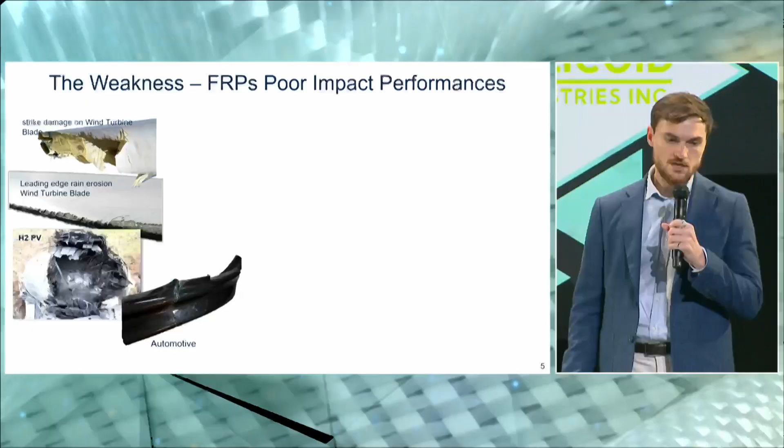What we tried to address was one of the key weaknesses of fiber-reinforced composites, specifically their poor impact performance. And this is a problem that affects a wide range of applications, from wind rotor blades, hydrogen pressure vessels, automotive components, aero structures, down to sporting goods applications.

The main reason is we tend to use in conventional FRPs brittle reinforcement and sometimes resin systems that lead to damage localization, poor energy absorption, and therefore poor impact resistance and structural integrity. And as a result, we tend to overbuild structures to meet safety and performance requirements.

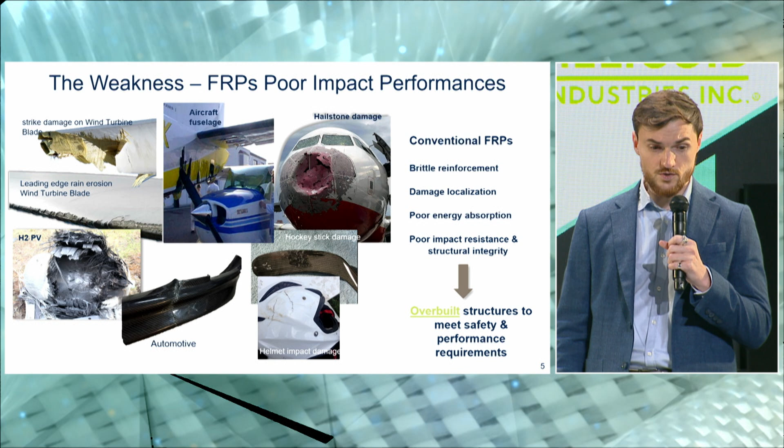What we did is to get inspired by nature. In nature, you can find several architectures that have developed to resist impact and to protect animals and plants from external threats. Specifically, we looked at the mantis shrimp. This is a very aggressive animal. It uses its club to strike prey it feeds on, like a hammer, and it manages to crack shells, which are considered to be quite tough themselves.

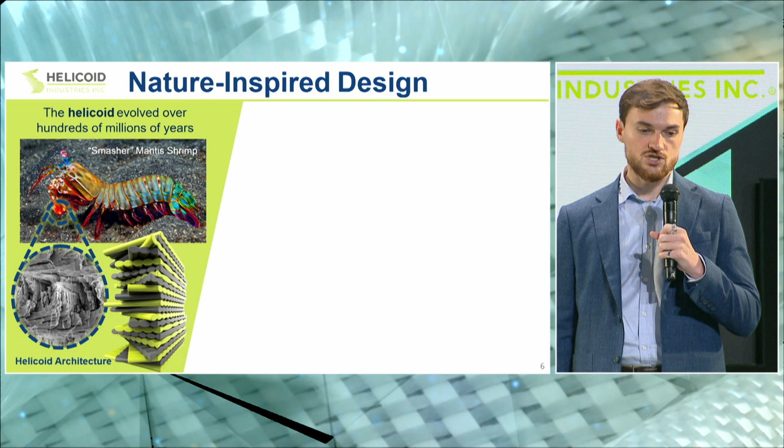If you look inside the microstructure, you will see that it is composed of UD layers, very similar to a conventional laminate design that we use today in engineering, which are slightly rotated with respect to each other to form this helicoidal distribution of fibers.

So compared to a traditional layup where we tend to use large interply angles, usually larger than 30 degrees, in helicoid we smooth the change in fiber orientation with angles lower than 30 degrees. And we also use blocks of traditional layup to tailor stiffness and strength of the laminate.

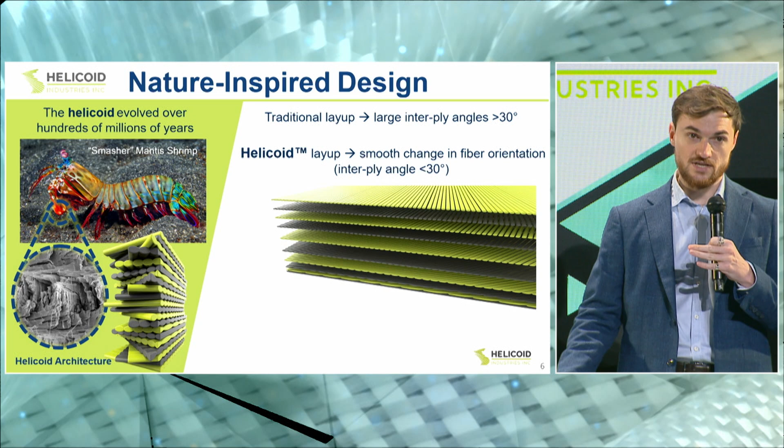The benefits of this are, first of all, we reduce interlaminar stresses. Therefore, we delay delamination onset in the composite. But more importantly, when damage initiates, you get this type of failure in the structure, where you can see a cross-section of the actual club, and in white you see a lot of matrix failure.

So the energy gets dissipated through matrix cracks, diffused through matrix failure, and you leave fibers undamaged. You create these highly complex fracture patterns in your structure that allow you to dissipate energy, but at the same time to preserve a very high structural integrity.

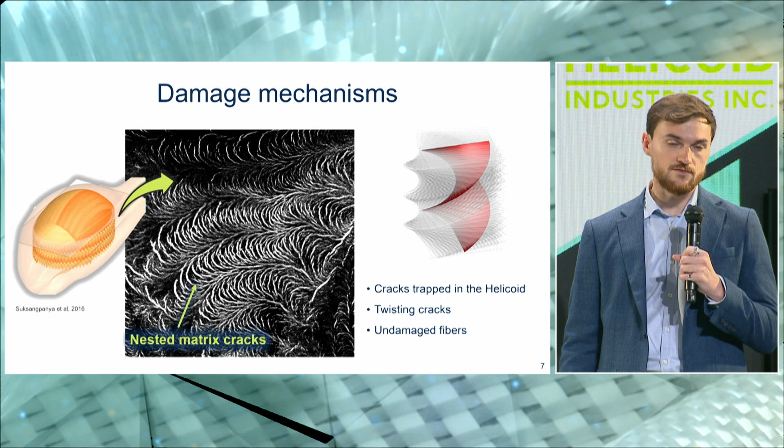A unique selling point of the technology, as I said, is a 2D fiber architecture. So you can use it with any type of fiber, resin combination, and material format, as long as you can maintain an alignment. So continuous fibers in a UD, multi-axial NCF, or aligned short fiber composites. It is tailorable to be fully quasi-isotropic, making full rotations with the helicoid architecture, or directional to have a preferential loading direction in your structure.

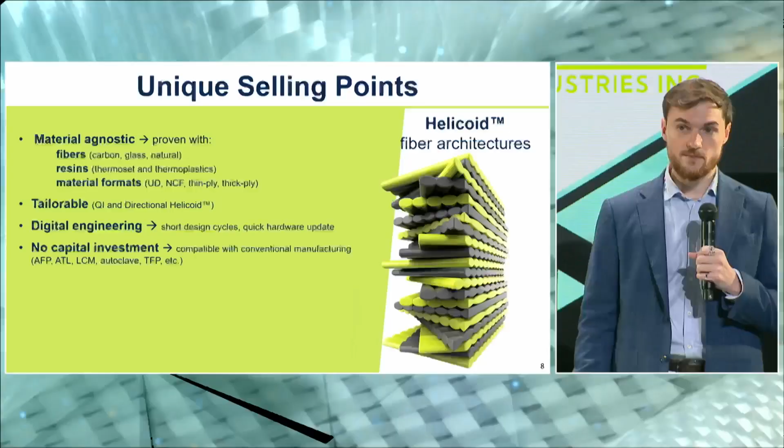We support the implementation through dedicated software and failure codes that allow us to simulate performance of our helicoid layups. There is no capital investment for the deployment because you can use the same manufacturing process and technique that you have been using for processing UD or multi-axial NCF. It is IP protected, which gives you a competitive advantage when you license the technology from us.

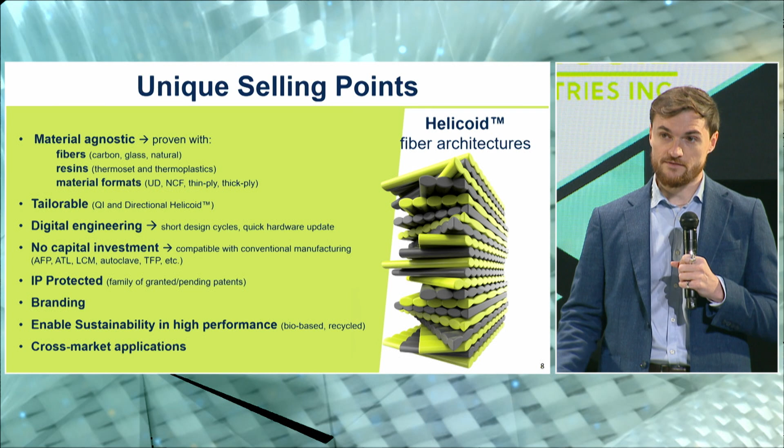There is a strong branding opportunity as well, that's more relevant for applications where we work, for instance, in sporting goods. And as I will show you later on during the presentation, we also enable sustainability in high-performance applications by enhancing performance of bio-based materials as well as recycled composites. And the technology works in cross-market applications. We have applications in sporting goods, automotive, aerospace, defense, and so forth.

Let me give you an example of our solution. One of our key developments at the moment is related to automotive EV battery enclosures, and it's in collaboration with TPI Composites and Saertex. I'm not going to spend too much time on this because I'm pretty sure you are aware of the importance of this application in the composite industry these days.

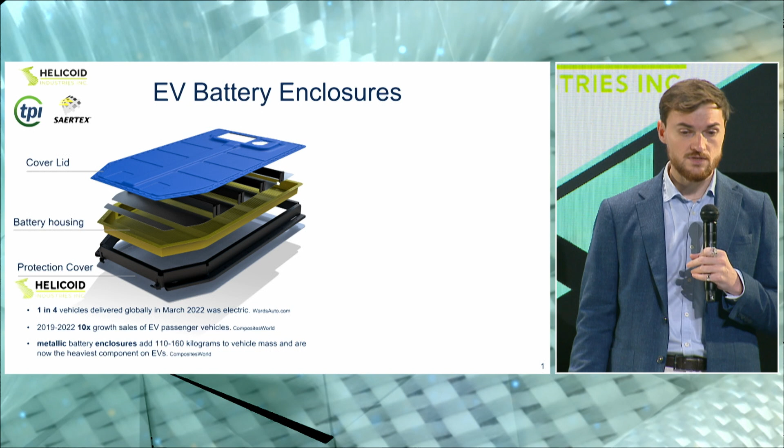So we are looking at deploying the technology in the protection cover of the battery pack of an EV, the part that needs to resist impact from the road. Beyond all the requirements that the part has in terms of fire resistance, EMI shielding, and so on, key requirements for mechanical performance are resistance to perforation as well as reduced deflection, because during an impact you don't want the battery protection to crash against the battery pack.

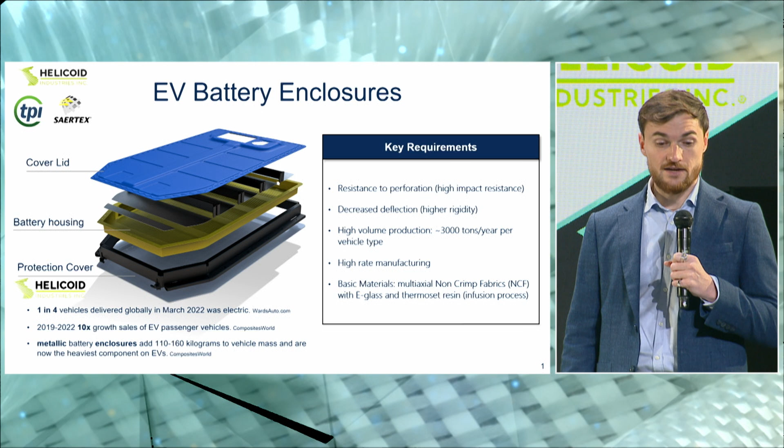It's also a high volume production solution, more than 3,000 tons per year per vehicle, high rate manufacturing, and for this specific application we use multi-axial NCF with a thermoset solution and a liquid composite molding.

So this is just to explain to you how we add value to the supply chain. So for this application, there is a supply chain already in place. We've got a weaver, Saertex, that supplies fabric to TPI, that molds the part and sells it to the OEM. So Helicoid interacts with the entire supply chain, tier 2 and tier 1. We work with Saertex to engineer the fabric.

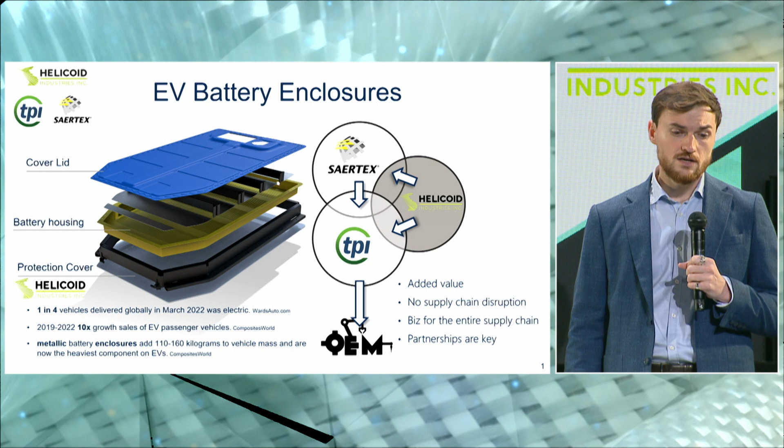We work with TPI to engineer the design of the part, because eventually what we deploy is a new, more efficient layup sequence of the part. And therefore, the idea is that we want to add value to the supply chain to enable more business for the entire supply chain, because in this way, Saertex is able to sell more of their materials with Helicoid technology to TPI, and TPI has a competitive advantage against other tier 1s for a more efficient structural solution.

Let me go then to the development itself. This is how we usually interact with companies in general. So we start off with a design phase. In this case, we received a reference solution from TPI that was making use of a combination of biaxial NCF and woven layers positioned on top and bottom of the protection cover. The woven layers are there just to protect from impact, and they add cost, more expensive than a multi-axial NCF.

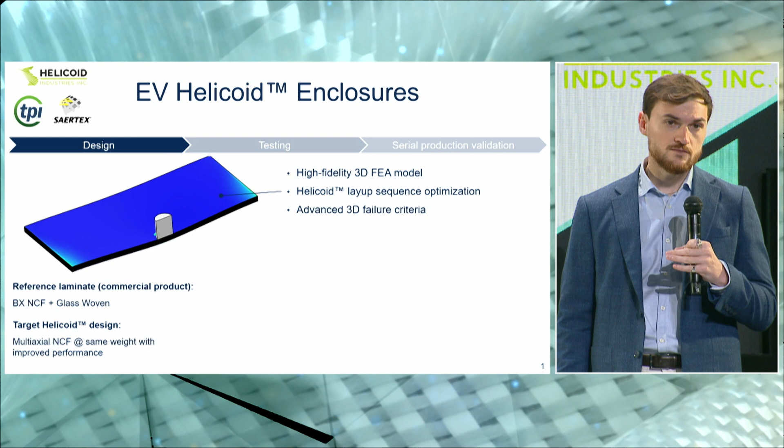The idea was to remove the woven layer and deliver a solution with our Helicoid design, fully multi-axial NCF, with improved damage performance and reduced deflection. So we performed, with our set of tools, a 3D FEA model. We have a set of advanced 3D failure criteria that are capable of predicting the performance of the Helicoid structure.

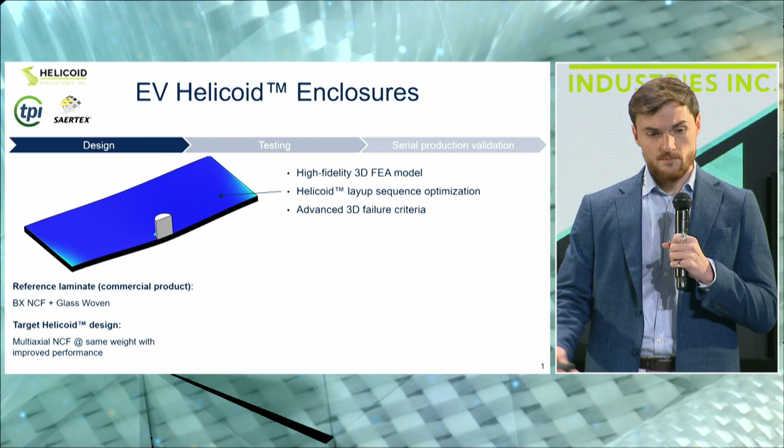Not going to spend too much time on the results, but the idea is that we can down-select the optimal Helicoid layup sequence in such a way that we delay the occurrence of fiber failure. We promote the formation of this subcritical matrix damage that I showed you earlier, and we reduce interlaminar stresses so that we delay the onset of delamination damage.

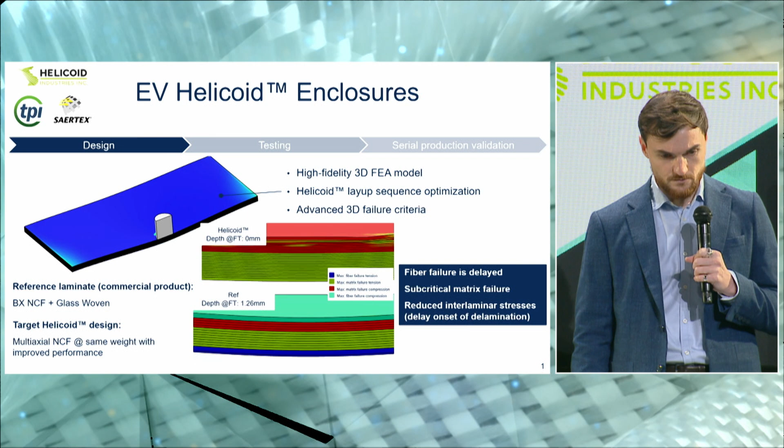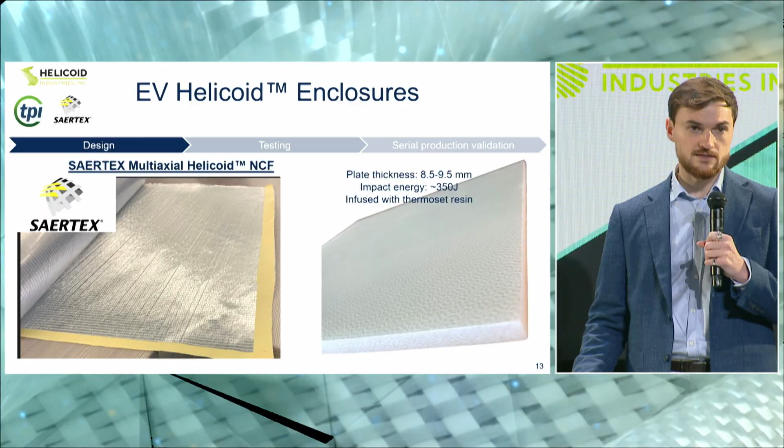The next step was then to work together with Saertex to engineer the fabric and make sure that we can deploy the stacking sequence into a multi-axial NCF design. We build the plates, infuse them, and then perform the impact test based on OEM requirements, in this case 350 joules of impact on the plate. We performed impact using an instrumented drop weight tower and a custom-made test rig, again based on OEM's requirements.

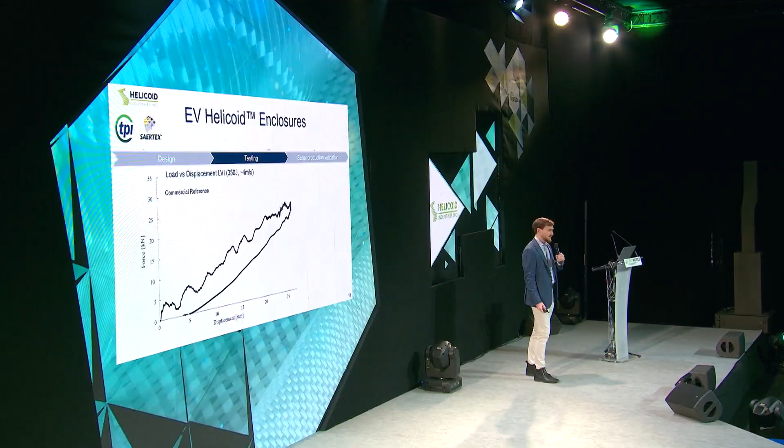And this is the type of results that you get. So you can get a full force displacement of the load history during the impact. This is for the commercial reference, doesn't say much by itself. But if you overlay the Helicoid design, here we were targeting same weight, just improved performance. You can see how our design was capable of achieving a 25% increase in load-bearing capability of the underbody protection, and more importantly, a 20% decrease in deflection. Again, we are using same fiber, same resin, just an optimized architecture.

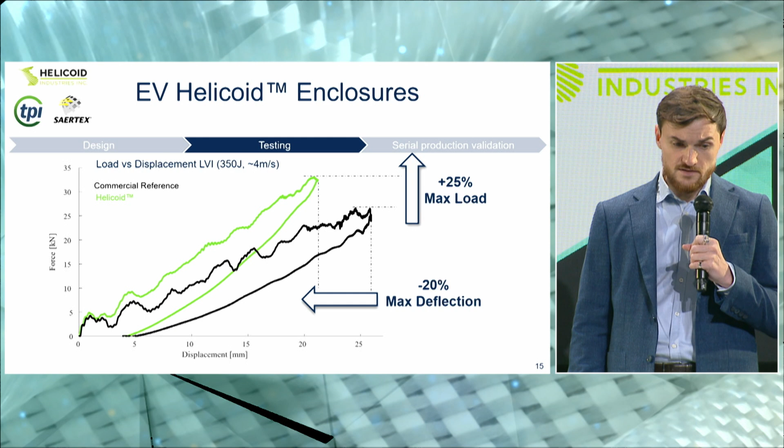This is not the whole story. In fact, if you look closer to the point of maximum load in the structures, you can see that there is a clear difference. And in the reference, you can notice high amplitude events. Now, if you are familiar with this type of test and data, you would know that these high amplitude events are associated with fiber failure.

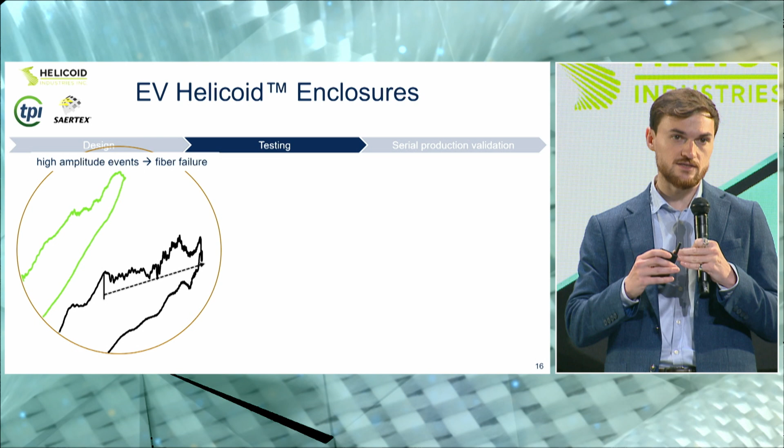And in fact, if you look at the back face of the plate, which is the face toward the battery pack, so it's the one that you don't want to have any damage on because it would reduce the clearance that you have with your battery pack, you will see that in the commercial reference, you have a clear puncture with fiber failure, which suggests very poor structural integrity and poor resistance to a secondary impact, while in the Helicoid you have a very smooth surface, just matrix splits, so just matrix damage, as I showed you earlier, and a much higher structural integrity with no sign of perforation initiation.

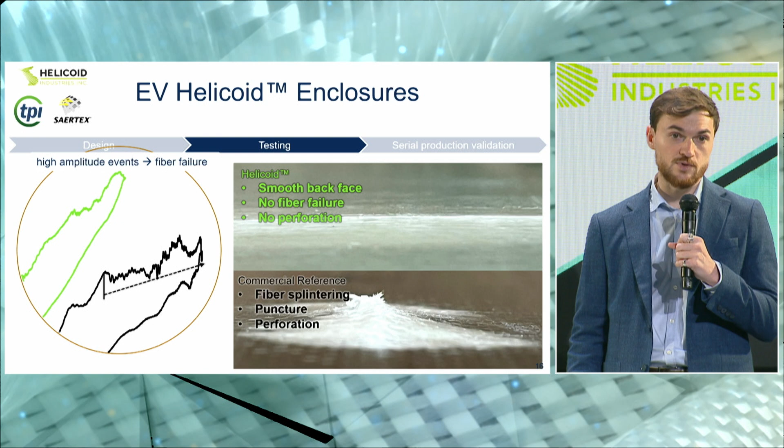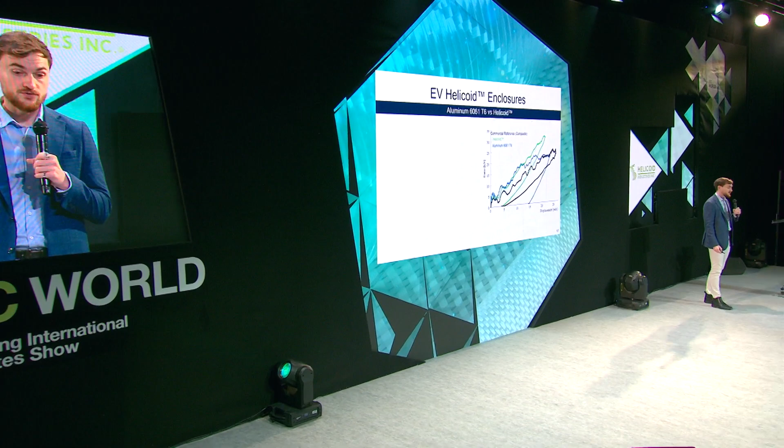We also did compare against the real commercial reference, which is the aluminum. And again, the benefits are very high. Once again, we are able to deliver much higher load-bearing capability, but more importantly, in this case, we have a much lower permanent deformation in the plate.

Compared to the aluminum solution. So overall, the benefit, I would like you to focus on the damage energy and residual clearance. These are percentage improvement over the aluminum solution. You will see that we are able to have 50% less damage in our solution compared to the aluminum, and about 139% larger residual clearance after the impact.

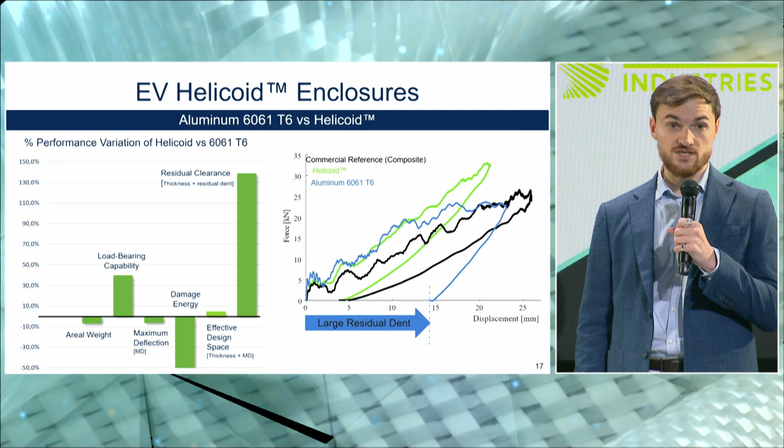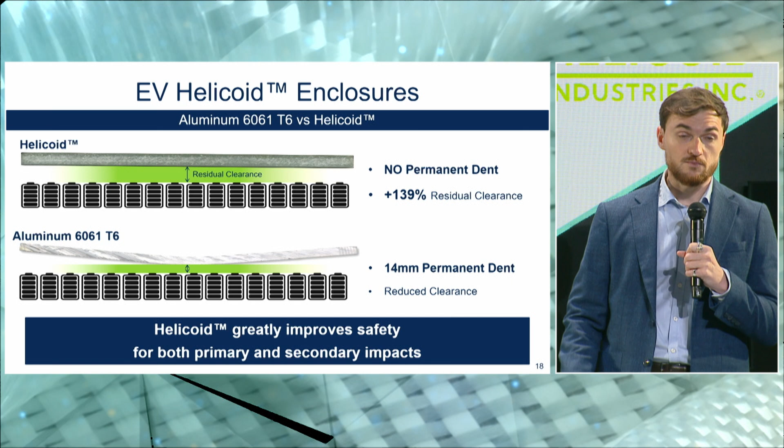Just for you to better understand, this is what residual clearance would look like in the helicoid. It basically goes back flat as it was originally, and this is the aluminum after the impact, where we have about 14 millimeter permanent dent. So you see that the clearance with the battery pack is very much reduced. So we deliver improved safety in this case for both primary but also secondary impact in the structure.

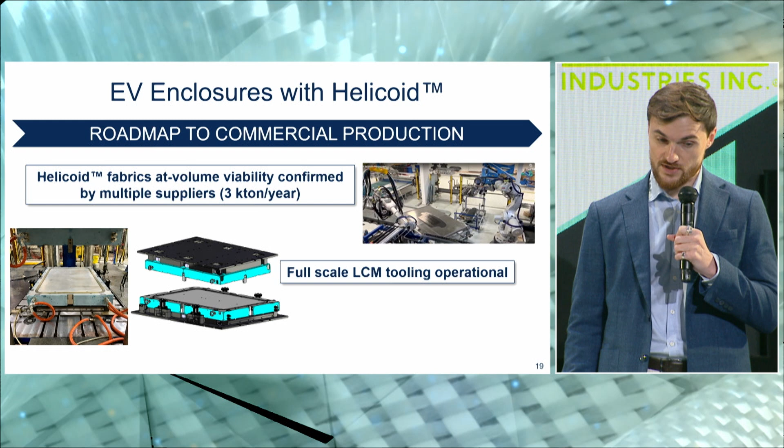We have a roadmap to commercial production. In fact, our special multi-axial design has been validated by multiple suppliers for at-volume quotes. As I said, 3,000 tons of material per year. There is a full-scale, fully automated LCM manufacturing cell at TPI that is able to manufacture this component at scale, and we have a full-scale component actually showcased at the Mobility Planet if you want to have a look later on.

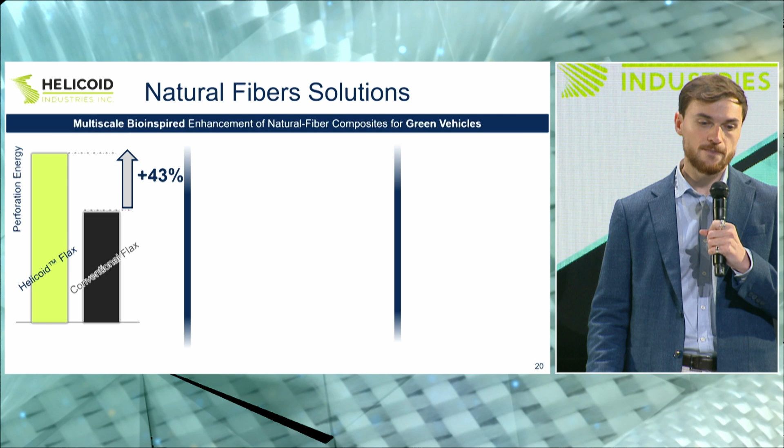The next step is to look at how we enable sustainable materials in high-performance applications. As I said, the Helicoid is a fiber architecture, so you can really apply it to any fibers, including natural fibers. So we did perform, again, impact tests on flax solutions, showing that compared to a conventional, we can improve by a great margin performance under impact, in this case, perforation energy. We have an ongoing project with the Department of Energy in the United States to deliver these solutions in a full-scale automotive component with a structural function.

And we are also launching with Revolin in sporting goods our solution with natural fibers on pickleball rackets, where we demonstrate an improved sweet spot and therefore improved playability as well as improved durability of the racket.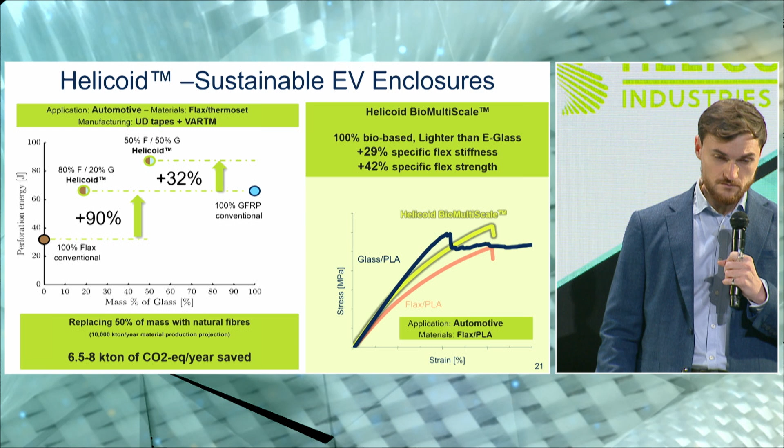We are also developing something which is more related to building up hierarchical composites, where we use 100% bio-based additives to the natural fibers that allow us to overcome performance of glass fiber solutions. This is a stress versus strain obtained from a flexural test using PLA as a resin, where we are able to outperform a glass fiber PLA solution, while our solution is 100% bio-based. So again, this is how, through our technology, we enable more sustainable materials in high-performance applications.

The last bit I want to talk to you about is impact fatigue. So far I showed you examples where we have a single impact, but we have done a lot of testing also to demonstrate durability under out-of-plane loading, such as impact fatigue. In this case, it's a collaboration with Mitsui Chemicals, where we use their carbon fiber polypropylene UD tape, Tafnex, to build a reference cross-ply laminate 0/90 and compare against a helicoid laminate. Again, using same fiber, same resin, same number of plies, same manufacturing technique.

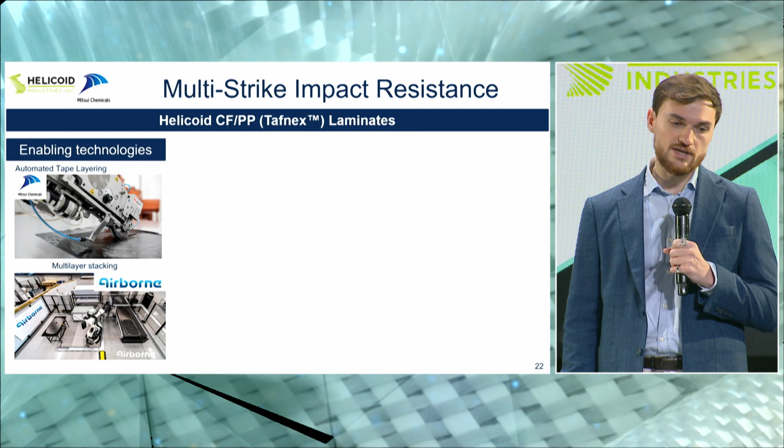And what we performed is multi-strike impact. So you have your sample, you impact it multiple times in the same spot at the same energy level, and you see how the performance degrades over impact cycles. In this case, the manufacturing was enabled also by Airborne through multilayer stacking that allows us to deploy our technology in commercial products. And this is the type of results that you obtain from this test.

You will see in black the cross-ply. In this case, we measured the maximum load reached at each impact over the impact cycles. And you see how quickly they degrade in performance after only 20, 25 impacts. But the helicoid in green, you can see how steadily they maintain the high performance over the impact cycles. And only after more than 50 cycles, you see a loss in performance.

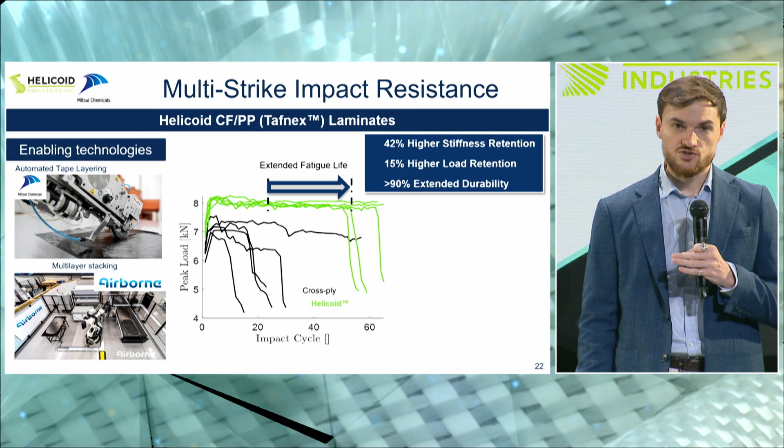So we were able to extend the durability of this composite by more than 90%, and also have a 42% higher stiffness retention, 15% higher load retention. Again, just changing the layup and having a more optimized layup that departs from the conventional way of designing composites.

These are two images that I hope you can see quite clearly. Otherwise, feel free to come to our booth to have a look at the proper sample, where you can see the damage accumulated in the reference cross-ply after 25 impacts, full perforation, lot of fiber failure, while in our case, after 65 impact cycles, you see very little damage still in the structure.

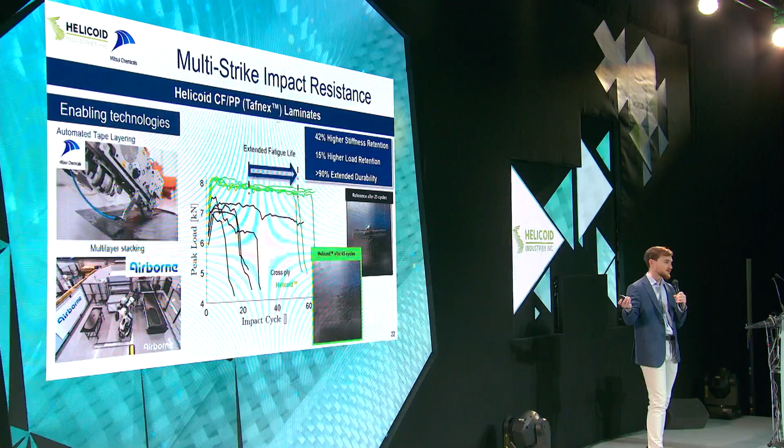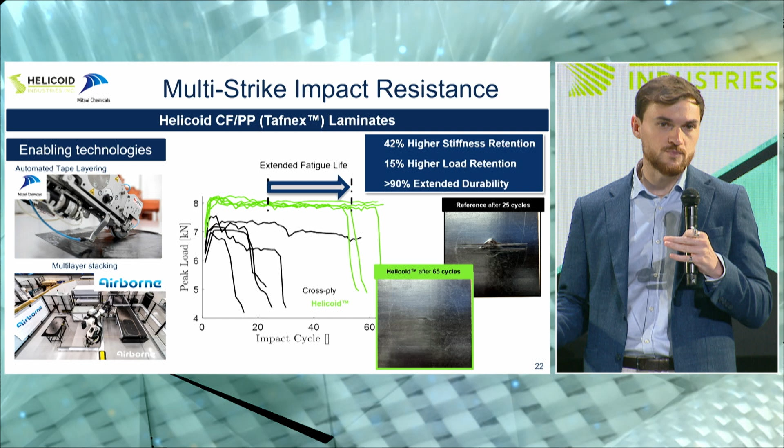And this brings also to the last point. We started hearing in the last few years about healing of composite structures with a strong focus on the resin, because that's the component that you can heal. The truth is, if you're breaking the fibers, there is no way that you can heal your composite and recover 100% of your performance. So maybe you can achieve only a partial healing.

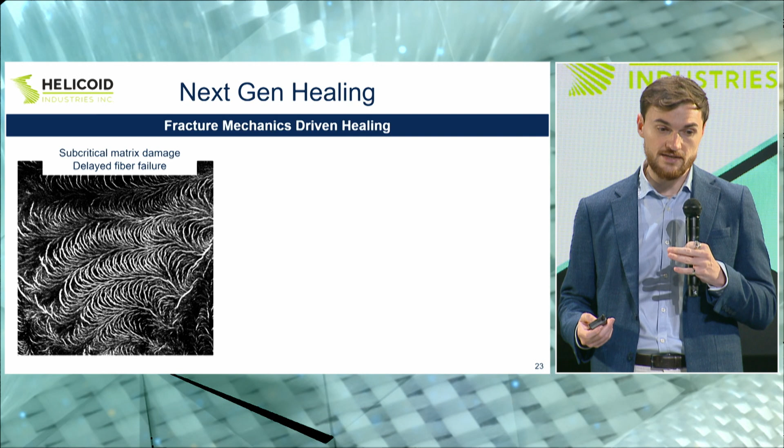In our case, with our fiber architecture, by dissipating damage through only matrix failure, and delaying, or in some cases avoiding completely the failure of the fiber, like in the samples that I showed you for the glass phenolic reference and the carbon polypropylene sample, you could really achieve a healable composite with a high performance retention. And then it's just a matter of using a resin that you can heal or reprocess, whether it's a thermoplastic, a thermoset with a healing toughening agent, or new resins like vitrimer resins.

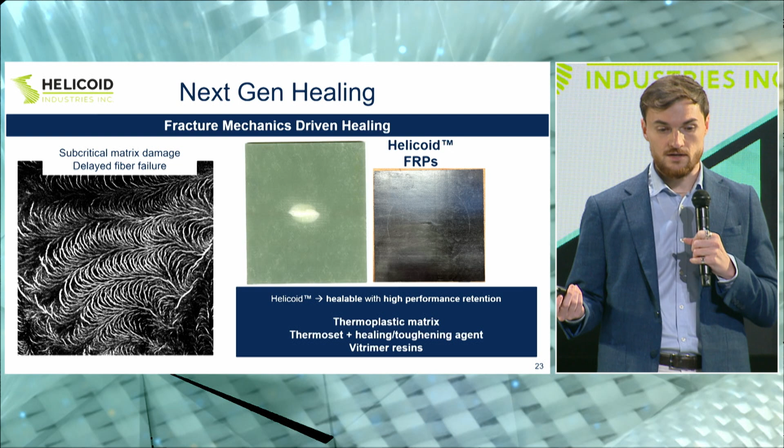This is just an example where we perform some tests on an epoxy glass fiber material with the toughening thermoplastic particles at the interface that also act as a healing agent. And this is what happens after impact. You can see this spiraling helicoidal matrix failure in the structure, and this is what you obtain after reprocessing the thermoplastic healing agent, where you get a full recovery of your damage in the structure, as it doesn't have any fiber failure.

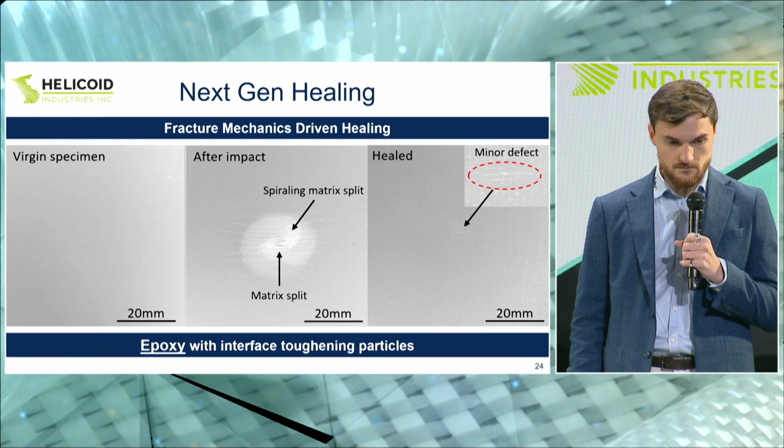So in conclusion, what I showed you is, again, the technology has proven performance in several different types of material formats and resin fiber combinations. We enable more sustainable and durable structures in high performance applications. It's a proven scalability, as I showed you with the example on the underbody protection panel of EV battery pack. We have a very versatile value chain integration, because the idea is that we don't want to take business away from anybody, but allow you to make more business by having unique solutions in your portfolio.

Partnerships, of course, are key for us, because that's how we are allowed to do business. We do not create any supply chain disruption. And again, we provide a full product development support through the engineering and the deployment of our technology. And you can use the technology as a platform, meaning that you can cascade the technology from one product to an entire product line, to deliver performance improvement for different applications.

Thank you very much. And if you have any questions, I'm happy to take those.

Okay. Yeah. Let's come. Sorry, I just can't hear. It's working now? Yeah, maybe.